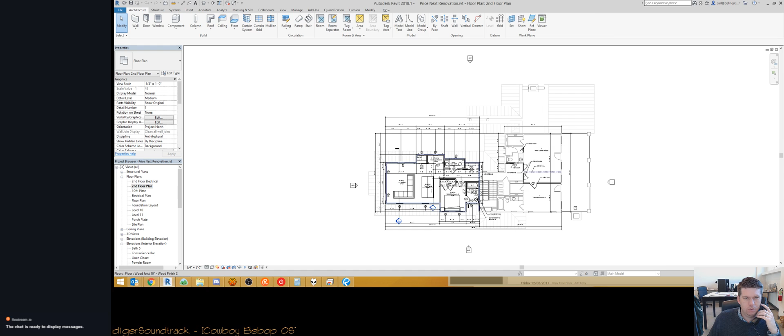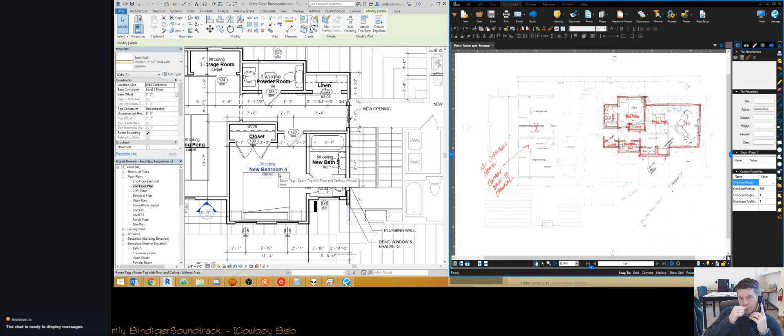Okay. Okay. Okay. Well, is that what you had in mind for right now? Okay. Yeah, that's fine. Yeah. So, no, nothing has changed. Well, I'll tell you what, when would be a good time for you? Okay, well let's try later this afternoon then, if that's okay with you. All right, we'll do that then. All right. Oh, appreciate it. See ya. Bye.

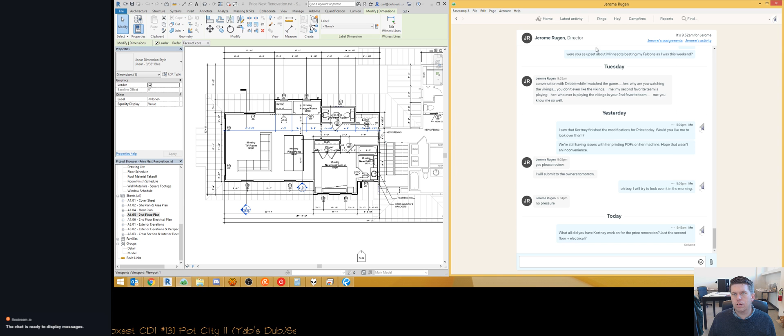Was it further instructions? I'm just getting an idea. Yeah. So I should have asked, but I thought he probably wanted me to set it up. Fine. Okay. Thank you. That's all. I just needed to know. I was looking to see because he wanted me to review it, so I just wanted to know what I'm supposed to be reviewing. Okay.

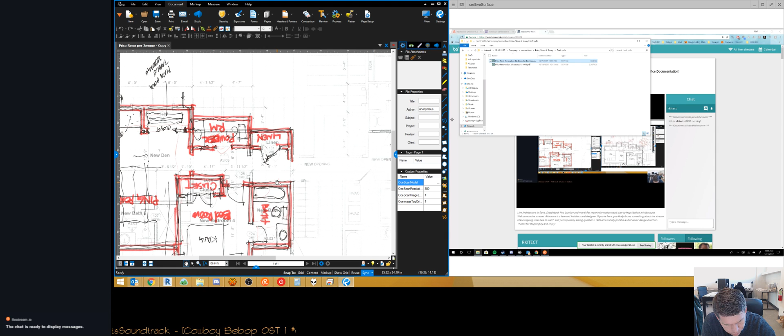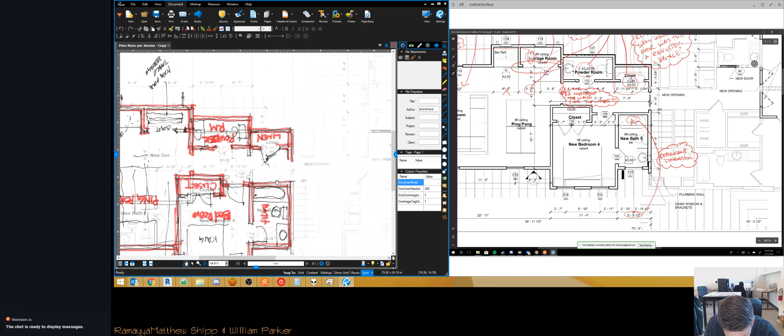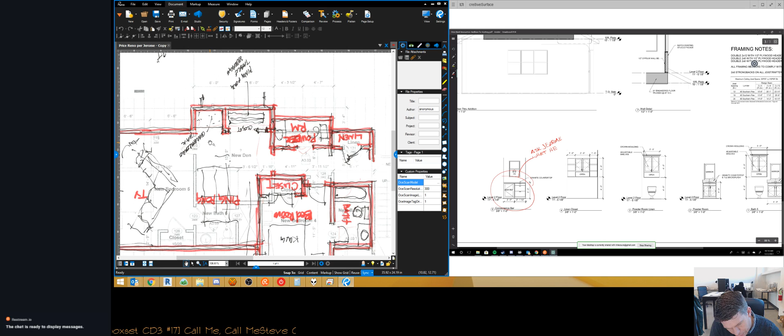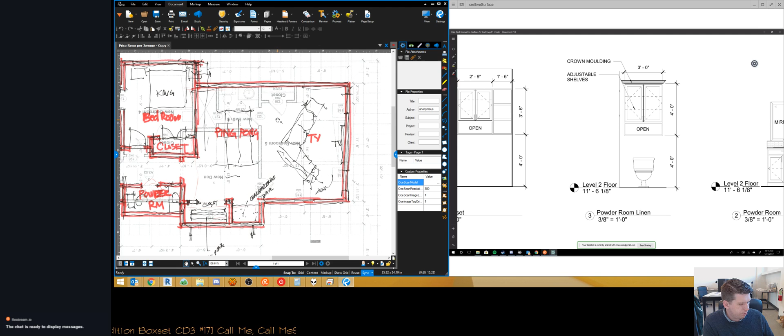Okay. Right? That's what this says, right? And maybe it is convenience bar. Convenience bar. Yeah, never mind. Oh my god.

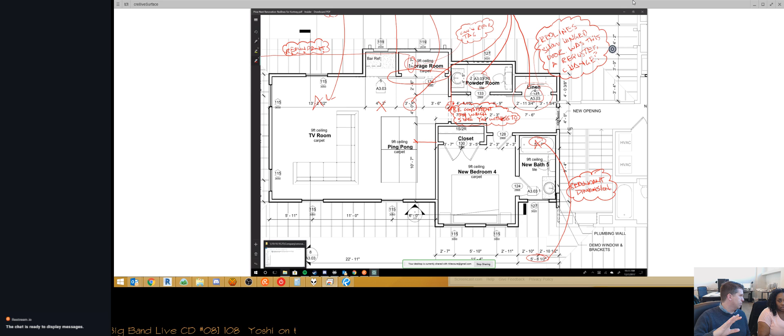Okay, so it's hard for me to know if that was a previous design or if that's stuff that's existing. And I don't know what he typically does for renovations. So I'll come back to kind of how I think this should be done in Revit, because I don't know if it applies to this at all. But I want you to be aware of how, when we do renovations here, I'd like for it to be done so that you can see that workflow.

So all these red lines are basically just looking at what I saw. So I don't know how much of this was already here and how much of it you did. So you can either just say, hey, I didn't do that, or you can just take it as lessons for whatever. So a lot of these, there's some of these dimensions that are redundant. So like this one up here is dimensioning the same thing there, so we don't need that. Like this dimension here, these walls are dimensioned right there.

So those are kind of tough to see because you're thinking about, okay, I got to dimension this stuff on the inside and these are on the exterior. But dimensioning is an art. I mean, you really have to have a good understanding of the project in order to get dimensioning to work really well. So I know when you come in on a project that you've never seen before, it's kind of tough to do, especially if there's already dimensions there and you're like, oh man.

A couple things, just be consistent with where things are dimensioned. There's a dimension here on the outside face of stud, which is correct for an exterior wall. But then when we come down here, this dimension is to the other face right here. So just be sure you catch things like that.

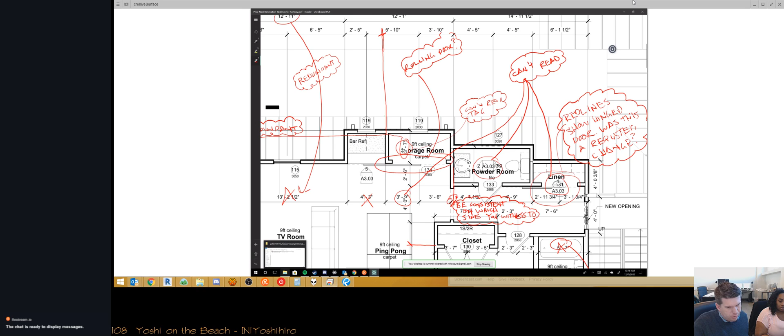I wasn't sure about the rolling doors because the red lines showed a hinge door here, and I wasn't sure about this. So I wasn't sure if the rolling doors were something that you added or something that you and Jerome had talked about.

Yeah, and I agree with you. I don't -- this one I think is okay, but I don't know. What we have to consider is that, unless the track goes all the way across this wall, it shows that it stops here. I don't know where. I guess it's big enough to do that.

I guess this is fine. The linen door, I think that probably goes back to a hinge door. Okay, that one right there.

Another thing we probably want to consider on this elevation is whether or not we have -- if the track's going across, then we definitely have a header across here, at a different height than the ceiling. So this ceiling is 9 foot high, and if this is an 8-0 door, then we have to have a header probably about 7 foot 8 or 8 foot, something like that, so that track can go across the top of it. So in the elevation, you might want to just show that there's a header or something right there.

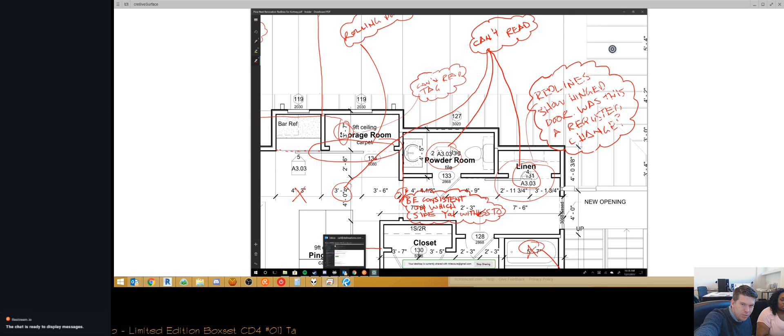Some of these were just difficult to read. Like you can't really read this very well. I can tell that's a 9, but it's hiding it. So just take a look, nudge the 4 foot down. This one right here, you can't really read anything, so you just want to move the elevation up, and maybe move the tag, the door tag and the room tag down a little bit. Same thing here, just kind of clean things up.

Did Jerome say that this is a special linen closet, or did I just see on the red line that it was a linen closet? Okay, so it might be that this doesn't really need the elevation treatment. It might just be shelves and rods, but we'll leave it that way and see what he says.

Same thing down here, so we can pick up this wall right here. I didn't see any other dimensions on it, so I don't know if I might have missed something there. This one's a redundant dimension from down here, so you can just get rid of that. But also -- well, actually, they are dimensioned to the same thing, so you're good on that one.

And I think that was it. Any questions about that sheet for red lines? Not really. You didn't do any of this stuff, right? Did you say that to dimension this right here?

The ping pong table? Not the ping pong table. This is to the wall right here. Oh, okay, we missed this wall. There's nothing telling us what that depth is, and you can pick that up. This dimension string is fine, but you're right, it does kind of read on the ping pong table.

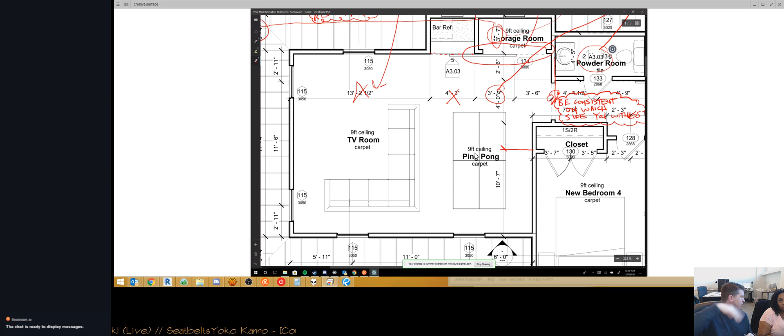I don't know that we need a room tag for the ping pong table. I was thinking that, but I think you just put TV room and label this as a ping pong table. I don't think we need to label this as a separate room. Did you use room separation lines? Okay, you can just get rid of those, because this will all just be one space.

Overall, good job. I think it's just, like I keep saying, we're getting down into those smaller details. It looked like you picked everything up that he wanted you to do, so good job on that. I do have a question.

Usually on the renovations, are the dimensions off? Usually, like, one floor. Yeah, sometimes it depends on what's existing and what's new construction, and without knowing what was already there, it's kind of hard to tell. I don't know if this is a building we designed previously and they're doing a renovation on it, or if it's something where we went in and got measurements of everything, because it's a very detailed model for a renovation on just the second floor, which tells me that we might have already modeled this in the past, and this is just a renovation on it. Without knowing that, it's hard for me to say, but when you go out and get field measurements, the measurements can be a little weird. And what I typically do for renovations is we round to the nearest eighth of an inch and just document it as existing walls.

So for the electrical, mostly good stuff. I don't know about the phone line, but if it were me, I'd put it on the sides here, not next to the TV. I'd put it so, like, if we could have a table here where the phone station was sitting, that way we're not walking up in front of everybody watching TV to answer the phone. Maybe even back in the corner or over by the bar. The bar might be a good spot for a phone jack as well.

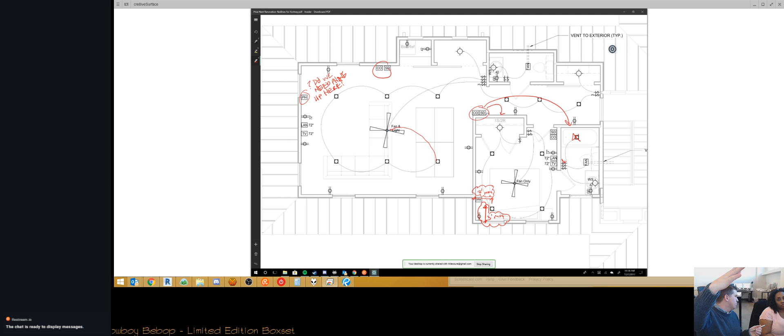The only time you really need an extra light in there is if it's like a pantry and you need to be able to see what's going on in there. But I will say a good spot for a light might be a small can light to accent that convenience bar right there, maybe just with a switch right here. That might be a nice little touch to accent what's going on there. Now there's a window right there, so maybe not, but we'll see.

So these lights in the bedroom - one thing you need to keep in mind for lighting is that as it gets closer to a wall, you start getting a bright spot. You see how close that light is to the wall, and how much brighter it is under each one. So in a bedroom, you don't really want those hot spots on the wall.

It's better to try to move those away from the wall, and if you can, try to get them to where they're about 4 foot, maybe 5 foot apart from each other. Do like a 5 foot square and center that on the fan, or even a 4 foot square and try to center that on the fan.

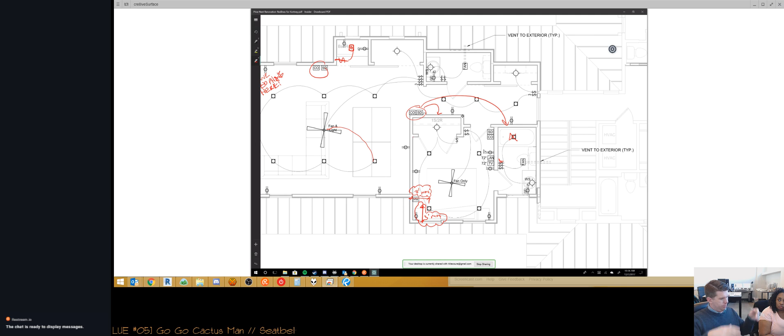They can be a little closer to the fan because you want most of the light in the middle. Do you know what an IES file is? For every type of light fixture, every luminaire - which is the light, the reflector, and the housing all together - manufacturers produce what's called an IES file.

An IES file is a plan and elevation view of how much light the luminaire gives off, and most of them look something like this, where they kind of cone out. So if you put this really close to a wall, you get a lot of bright light here, and then it fades off as you get down. If you move that wall further out to about where that cone dies down a little, it really doesn't matter above 6-7 feet how bright it is, because most of the stuff we'll be looking for is on the ground or below.

So you can move those further away from the wall so that the light at the bottom hits the wall and not up above where we're looking.

You okay? Yeah, I'm fine.

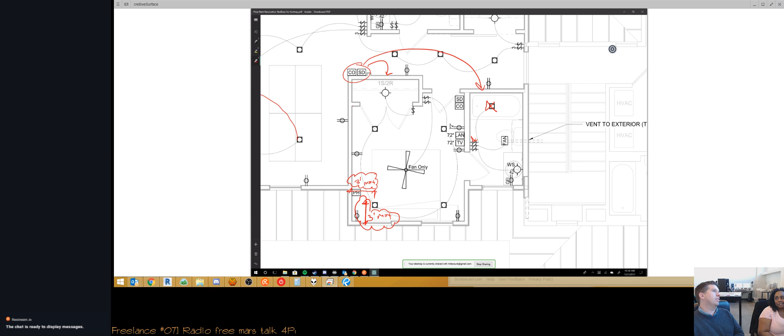So we can - I forgot to mark it anyway as a waterproof light. And the only time you need to do that again is when it's a shower. If it's just above a bath, you don't need to do that.

But I did actually just notice we do need to go ahead and put - we have a shower family, so go ahead and add that shower family. That's not on the electrical, it'll be on the actual floor plan.

I'm debating whether or not - let's do this, let's do a vent light instead of just a fan, and keep the vent to exterior. Let's keep the switch, and instead of getting rid of that switch, let's do this: we'll have a fixture, a vent light in the bathroom on the ceiling, and that'll give you enough light for the shower, because this sconce probably won't be enough to let people shave their legs or shave their face or whatever they do in the shower that they need sufficient light for.

So let's go ahead and do that - put a vent light fixture in above the toilet right there, and that way there'll be two lights in the bathroom. Everything else looked good.

Do you know what the code is for electrical outlets?

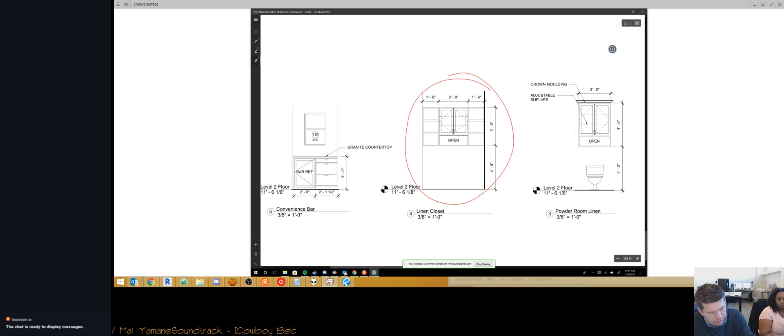Oh, we had one more sheet, didn't we? So all this looked fine. Go in and put 8 foot or whatever. The header. Okay. Across the top there. And that would just kind of be a line showing on the. Yeah, and then

soffit above. You might want to put a note on the floor plan that there's an 8-foot ceiling in that space. Okay. Or maybe the soffit just goes across the top and it's a 9-foot ceiling still. I'll let you use some design sense. You know, what do you want in there? So I think your options are. You've got a window here. Here's your bar, right? And then your door is here. Rolling door.

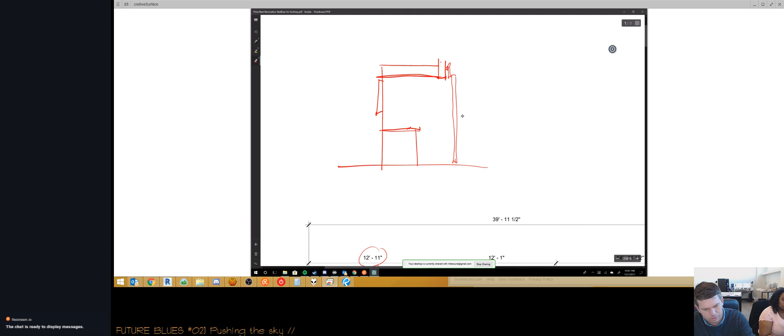Okay, so the question is at 8 feet, which would be the same height as the door, do you want it to come back up to a 9-foot ceiling, or do you want it to come straight across? And then, probably looks better if it went back up. And then document that accordingly. Okay. If it's a soffit, then go ahead and draw that like that. Okay. And then with that, if it's an 8-foot ceiling, then just draw a single line.

Okay. Excuse me. Still a little disgusting, so I'm gonna be making disgusting noises for a little while.

I know. So whatever you decide to do here, if it's a 9-foot ceiling, then draw the 9-foot ceiling. You don't have to call it a 9-foot ceiling. Just be sure that line shows at 9 foot. Like we're not actually showing the ceiling on a lot of these. So you want me to put the 9-foot ceiling, but not have the actual? Yeah, I'd say just show the line, and maybe just make sure that if you go with an 8-foot ceiling, that it's not right across the top of the window. Okay.

Show ceiling. Sometimes this program won't show me that it draws something, and then it refreshes and I have like 3 times the thing written because I tried to write over it. Okay. All right.

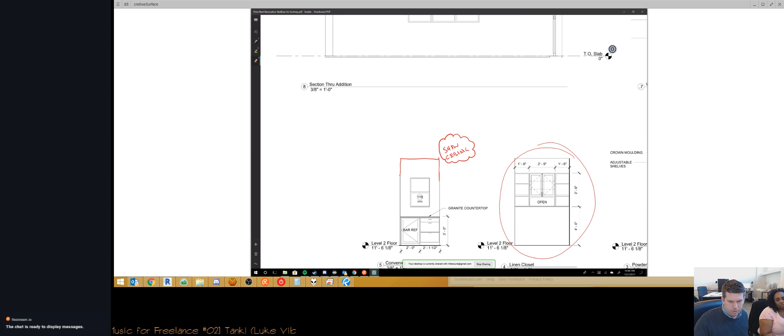So any questions about red lines? No more questions. If you're at a stopping point, I'll ask if you could go and take care of these, because he wants to show these to the owners this afternoon. But real quick, I just want to show you the way that I would typically expect this to be done. Did he mention, is the second floor completely new? Is it all being added, or is there a second floor already there? He didn't say. So I think there was a second floor already there.

So in that case, normally what I would see is these second floor walls would be. And I don't know what's going on here. I don't know. So it was already there. So see, that one's existing. So I'm wondering if this stuff is being added on. Oh, it looks like there is an existing window that's being deleted. Oh no, it's just above. I actually added that. Oh, you added that. Okay, to the background, that's fine. So I'll show you how to deal with that too.

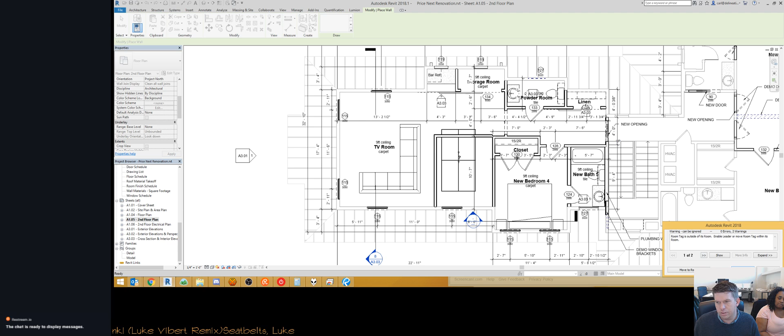Why can't I? Okay, fine. I knew you were going to do that. Revit likes to connect things that I don't want connected. So let's say that there was, I'm just going to copy. Oh, it's not going to let me copy that.

Let's just say all this stuff was existing already. Okay, what we can do is, just like this wall here was demolished, we can go through and use my favorite tool, the demolish tool, because it's shaped like a hammer, and you can go through and demolish these things. Right, and they now show as demolished.

And if I go and look at these objects, you can see it was created in existing, and it was demolished in the new construction. Okay, so this gives us a way to track what's being removed in this phase. And typically we would have an existing drawing that has the dimensions of the existing stuff just as a reference. And then we would have a demolition drawing, which just has the existing with the stuff that we're removing.

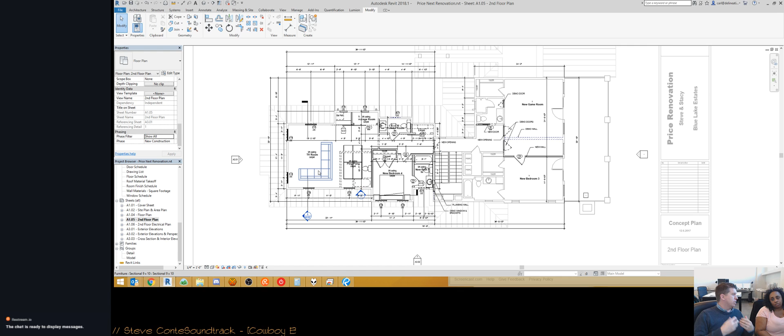So when we get a renovation here in this office, I'll want to be able to use the model to track those different phases. In the case of this project, I don't know if those walls that were already there were actually existing or if they were from a previous design, but you'll want to check with Jerome and ask him, hey, were those walls existing in the house, or was that a design that we're not doing with the bedrooms? Because it showed bedrooms and bathrooms, but it all says new. It says new den, new bath. So I'm thinking this was a design where the owners decided they just wanted one bedroom and a game room.

But you can ask about that stuff, and if it is existing, it would probably be appreciated that we're able to track it. So instead of just deleting it, we put it in the existing phase and phase it out, demolish it. I'm not going to save this because it just wrecked that. Does that make sense though? It does make sense. Okay, cool.

This is saved under the Price renovation, under I think draft PDFs. Renovations, Price, draft PDFs. Yep. Red lines for Courtney. Okay. All right. Awesome. Thank you. Yep. Thank you.

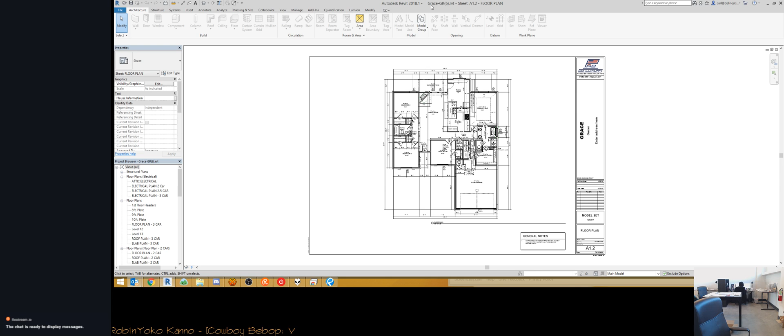Okay, go away. Why? What? When you're done with that, Courtney, go ahead and print it. Thank you. Ooh.

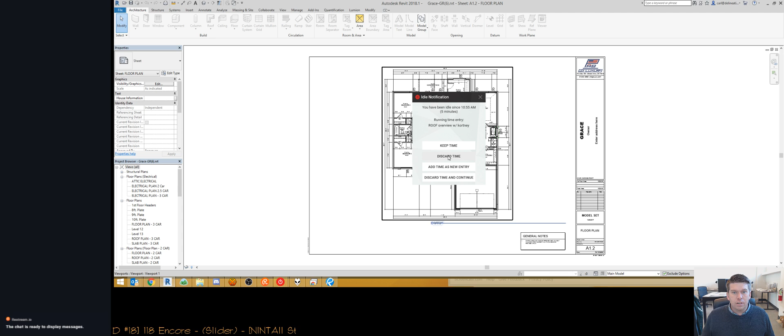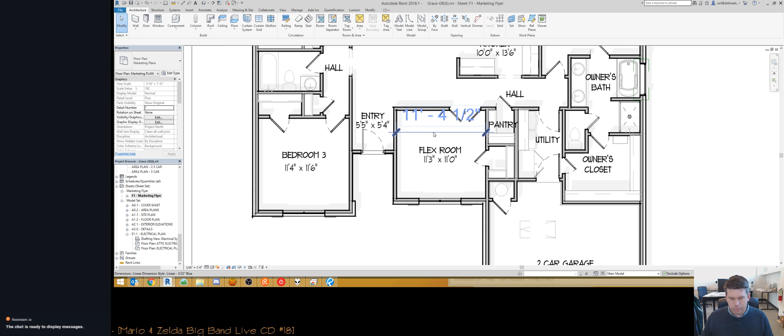Where were we? I think we were doing the standard plan for GR. Getting the marketing plan ready. This is GR Flyer Standard, and today's date is the 7th.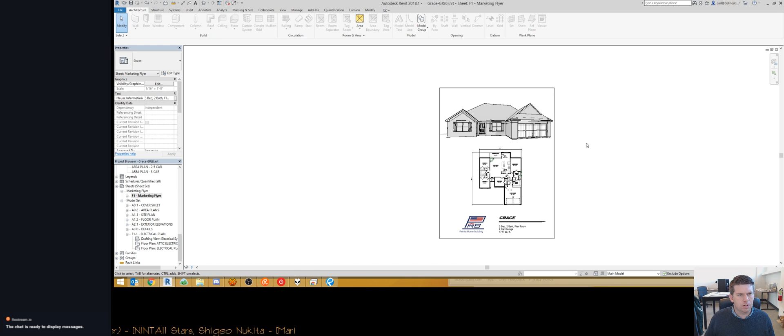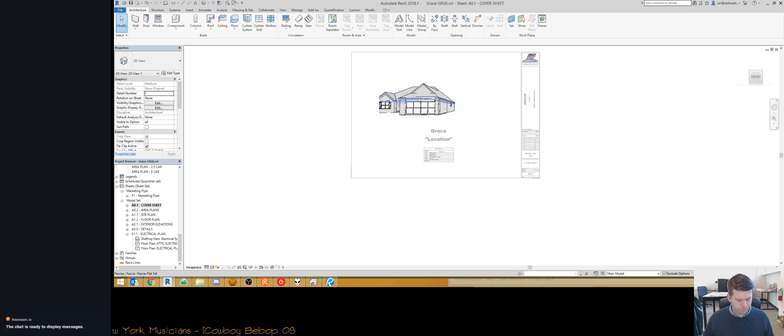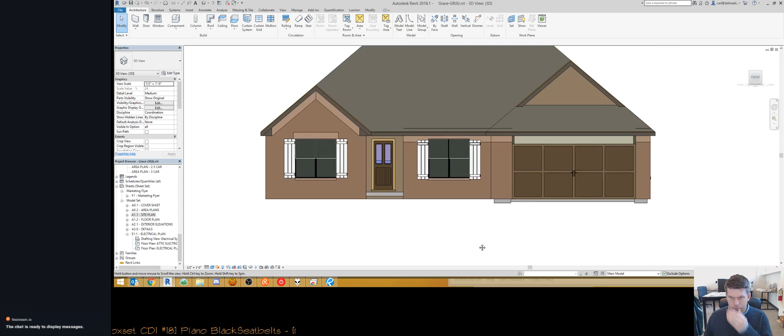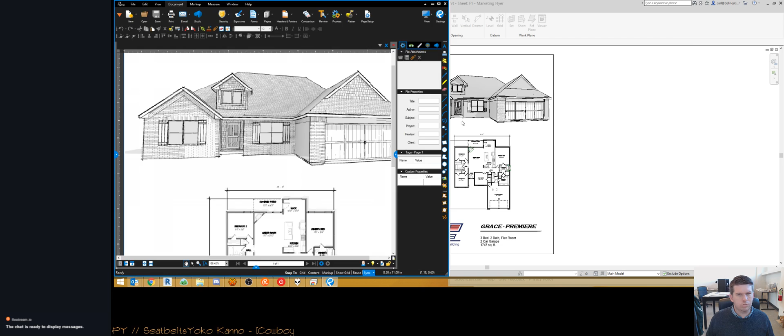Huh. I wish it wouldn't do this. It's pretty frustrating. Let's see if I can get this to stop doing that. Looks like the answer is no. It's really disappointing.

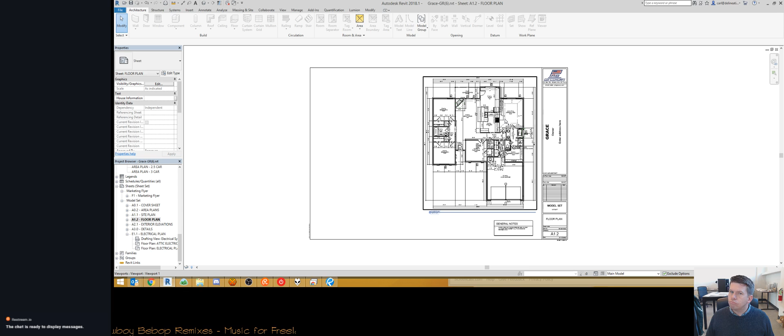Why are no elevations shown?

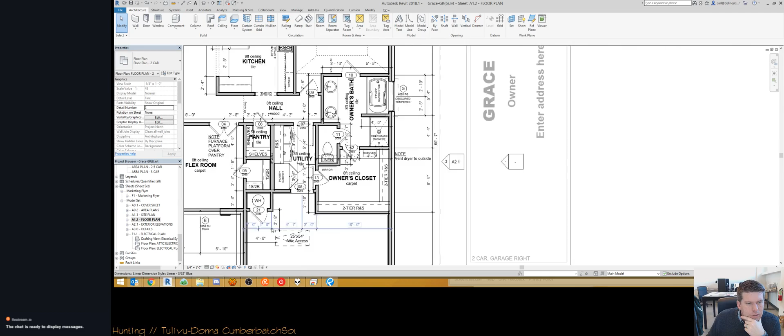I think this is pretty close to done here. So these dimensions get a little tough to read around here, but I think a contractor worth their weight will be able to decipher this. That's a little close.

Alright, so I think I need to kind of switch this up a little bit. There's brick sill. Whoop. Brick header.

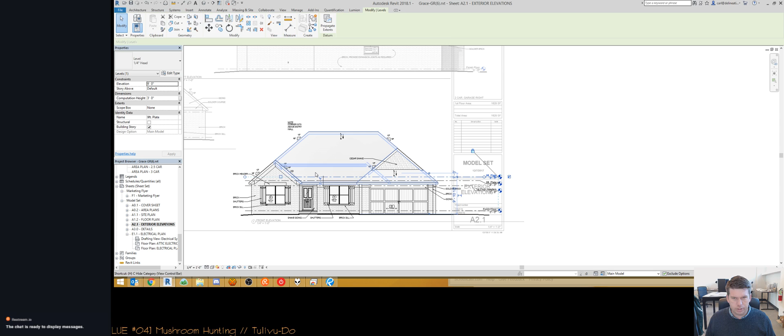I mean, I think. Well, that doesn't even need to be there. I think I'm going to bring this out here.

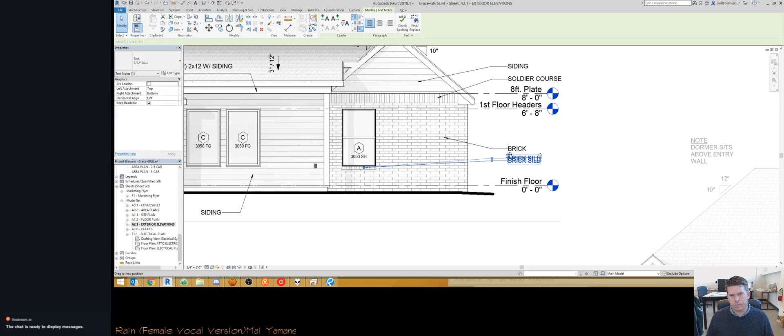Oh my goodness. Ooh. Sure. All right.

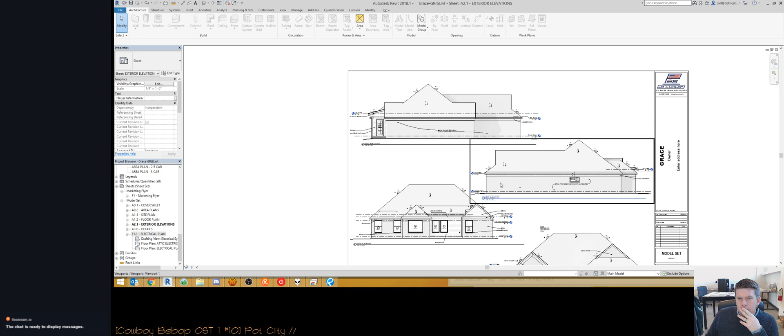Oh, we need to change this. Let's see, this is right elevation, and this is left elevation. I'm really confused about what's going on here.

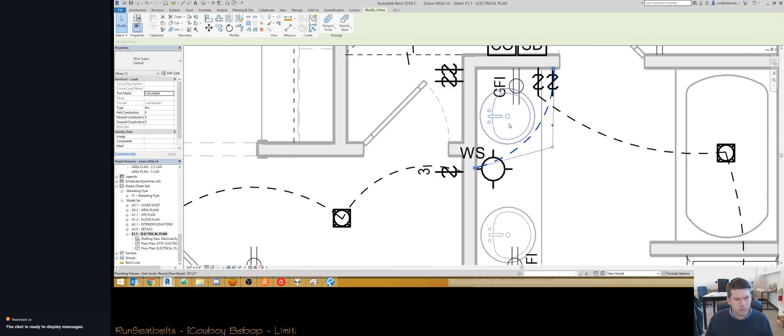Sometimes these work, sometimes they don't. Sometimes none of them work. But every time, it's just a matter of a little bit of work. Fix it. It's just a little frustrating because you have to fix it, and you have to check for it. One of those little quirks of mirroring projects that I wish didn't exist.

I think we're good on this. Print that bad boy. Print it, print it, print it.

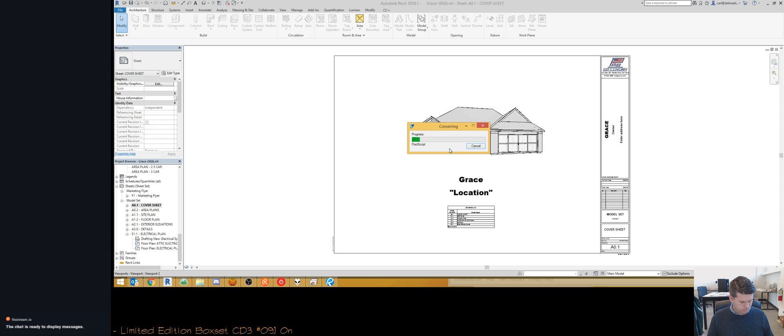This is GR. Right. Just gonna leave this like this. Or to call it Grace Premiere. Nothing changes there. This changes to Premiere. Right.

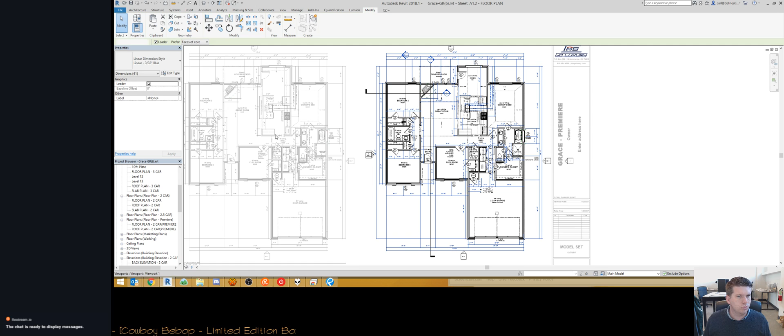All right, let's do this. No, just do it the easy way. So, did I get the electrical swapped? I did not. I need to redo. Electrical on standard.

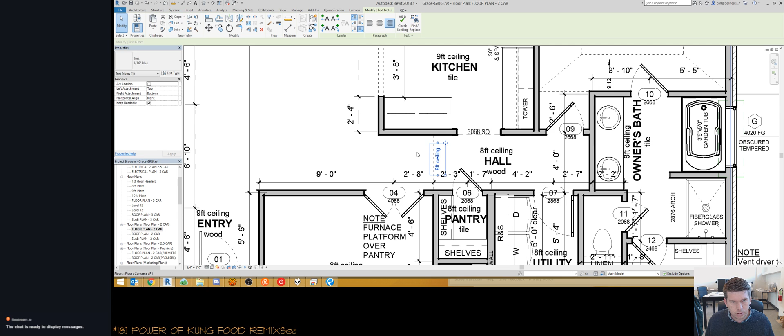Is this supposed to be a 9-foot ceiling all the way through? Hmm. Some of this just doesn't make any sense.

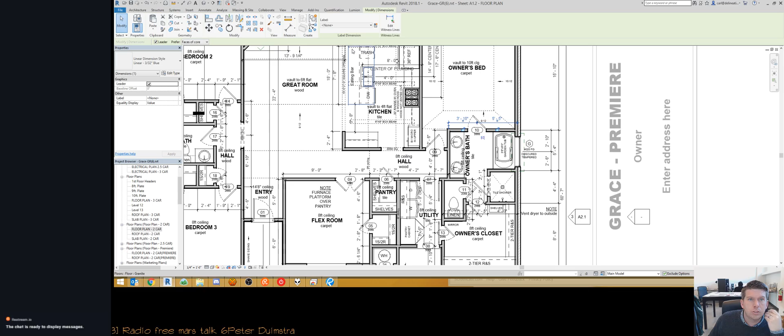What? Alright. That's what we'll do. It's ugly, but that's what we'll do. Whatever.

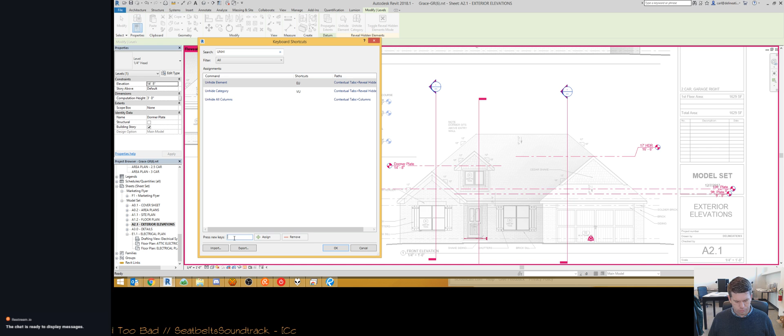Unhide elements. I'll change it to unhide. I wonder. I wonder if I can do this. X. I think

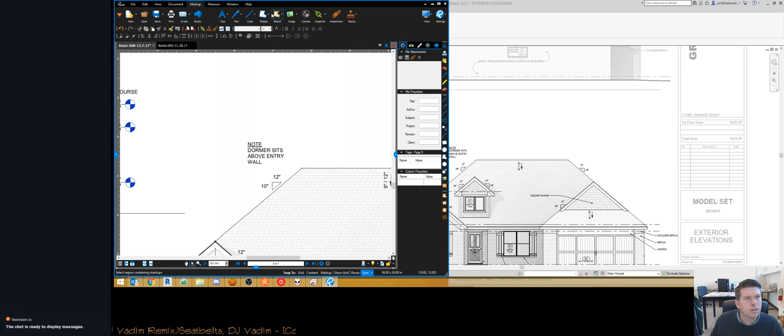Here, can I flatten document? Flatten markups. And then on the elevations, I just need to hide this. That's much better than just reprinting. Except that I keep having to tell it the same thing over and over again. Now it should show no markups. Alright.

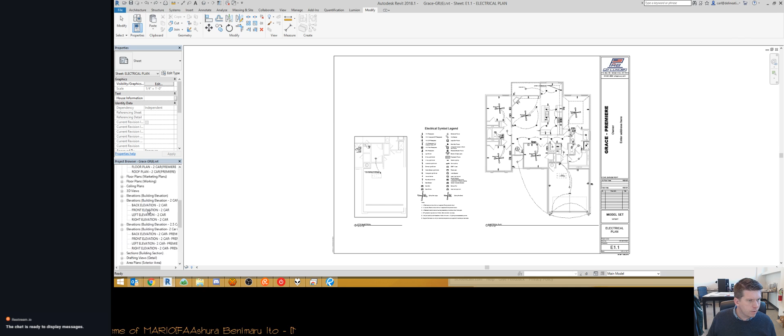Okie dokie. I think that's that for that. Nope. Electrical Premiere. There we go. Huh.

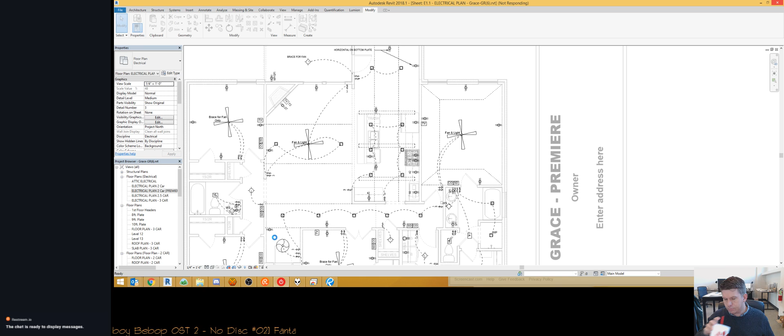Sure, let's save. I mean, I've been working on it for an hour. Yep. Just in time for lunch. I think after this I'm going to be wrapping up for a lunch break. And we'll be doing some lunch, and be coming back to work on, hopefully, office building red lines. And maybe I'll find on. That'd be nice. Save.

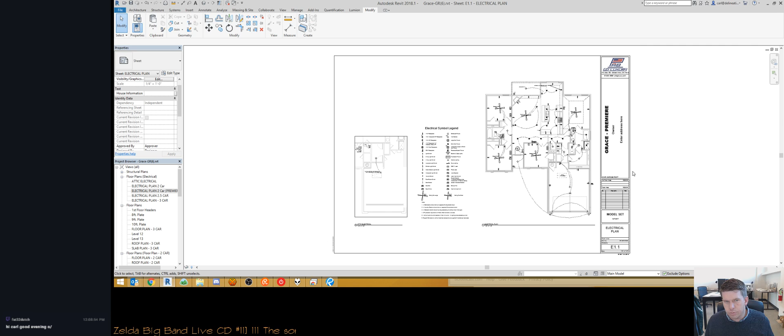And let's reprint this sheet. Current window. And that is 2GR electrical replacement. Looks good from here. What? Oh. Oh my goodness, save already. Jeez. Alright.